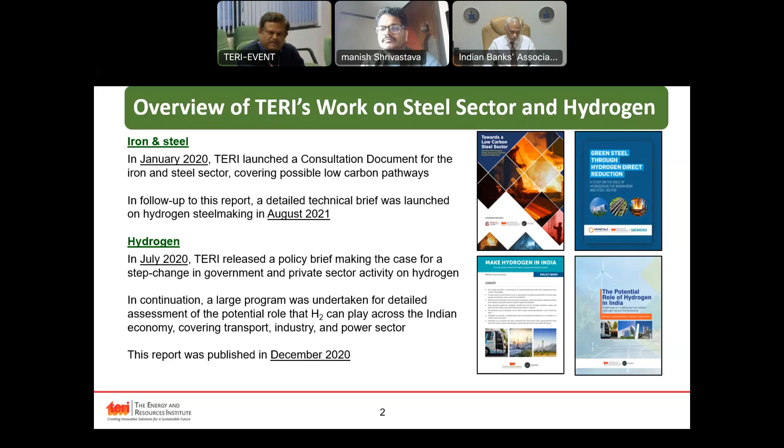I would like to begin my presentation with a brief introduction to TERI's work in the steel sector and also on hydrogen. Girish has already briefly mentioned it in his talk just before me. TERI has been working in the energy and environment sectors for the last 3.5 decades in the steel sector. The initial activities were in the form of conducting energy audits, mainly in the clusters of the secondary steel industry, doing the energy analysis, drawing the energy saving options, cost benefit analysis, and action plans for these industries.

So that is how TERI's journey began in the steel sector, and it built on this experience and worked in almost all secondary steel clusters across the country. Following up on this, TERI also developed designs of energy efficient technologies specifically for the secondary steel industry, facilitated pilot projects and demonstration projects, and worked further on policy briefs for implementing these technologies. So that is how TERI built its experience in the steel sector over the 3.5 decades. And as Girish mentioned, in the last 5 years TERI's focus has been mainly on the decarbonization of the hard-to-abate sectors, where steel is one of the prominent sectors.

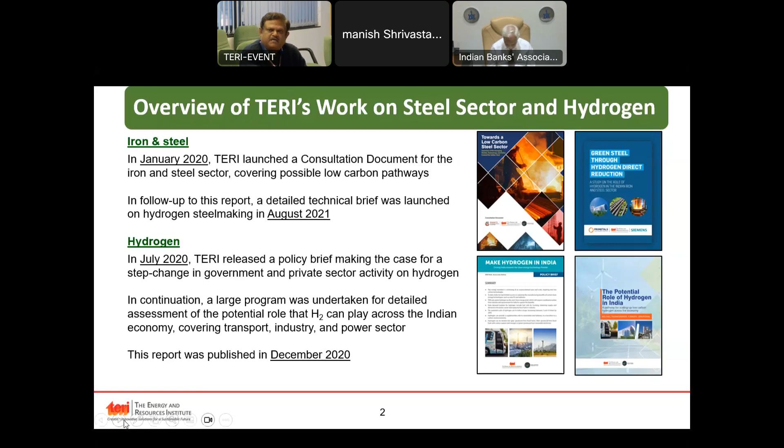Taking this work forward, TERI has come out with another publication, which is primarily based on a lot of consultations with stakeholders: Achieving Green Steel, a Roadmap to a Net Zero Steel Sector in India. In my next slides, I will be presenting key aspects, mostly the technology aspects, coming out of this net zero steel roadmap. While preparing this, TERI consulted various stakeholders, including industry, both large and secondary steel, technology providers, the financial sector, knowledge partners, and other key players. All these publications you can find on the TERI website. So that is briefly about TERI.

In addition to the projects I mentioned, TERI is continuing to work in this segment. We have been working on hard-to-abate sector decarbonization pathways, on steel, cement, and many other hard-to-abate sectors. We are also part of the task forces which the Ministry of Steel constituted. There are 14 task forces, one more has been added, out of which TERI has been the knowledge partner for seven of the task forces set up for a net zero steel industry for India. And there are other projects where TERI has been actively doing deep dive studies in the steel sector. That is about TERI's work and involvement in the steel sector.

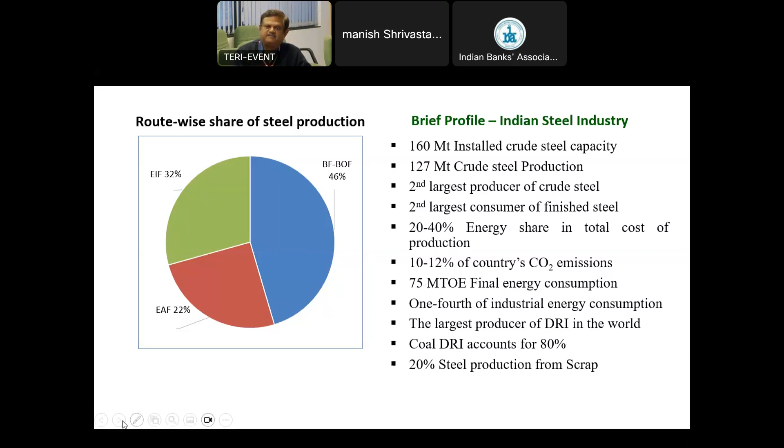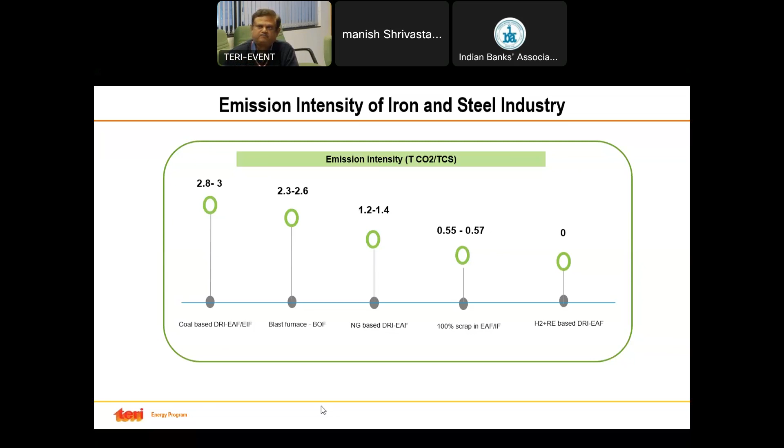Then I mentioned in my last slide about the DRI sector. So this primarily comes in the secondary steel category. Nearly 30 to 40% of iron is produced from this route. The balance is produced from the blast furnace route. So this is mainly the secondary steel segment.

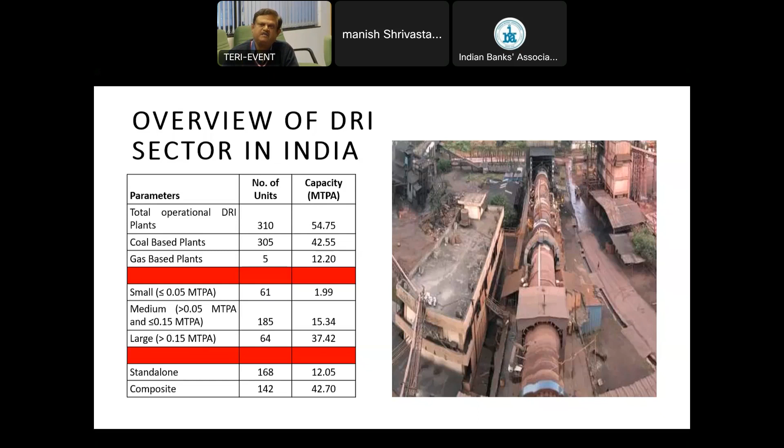Next slide, please. So that is about the DRI segment of the steel industry sector. This will mainly give you an idea of how steel making is in India, what are the main technology routes, and how is the emission intensity. Emission intensity is very closely related to the energy intensity and the fuels that are used. So that is why I have not focused on energy aspects of the steel routes.

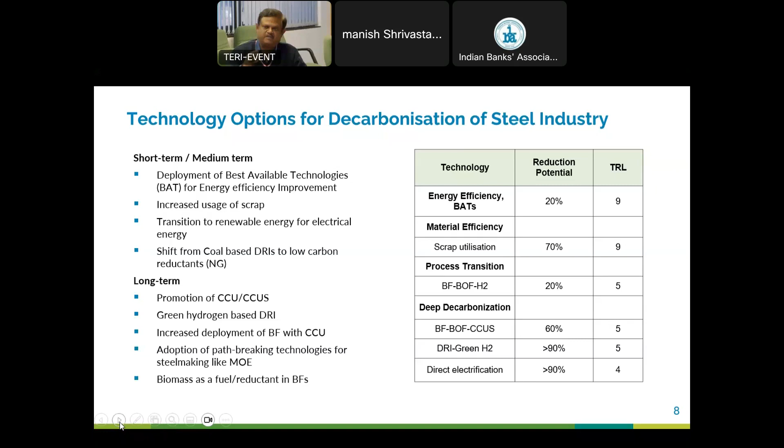However, we would need to stimulate demand for low carbon steel. The stimulation of demand requires a number of policy measures from the government, and the government should also focus on these things. Next slide, please.

Then maximize energy efficiency. This is one of the first measures I mentioned. The potential is high, 20 to 25%. It is a low hanging opportunity because the investments are low, the payback periods are attractive, and there are readily available proven commercial technologies. Next slide, please.

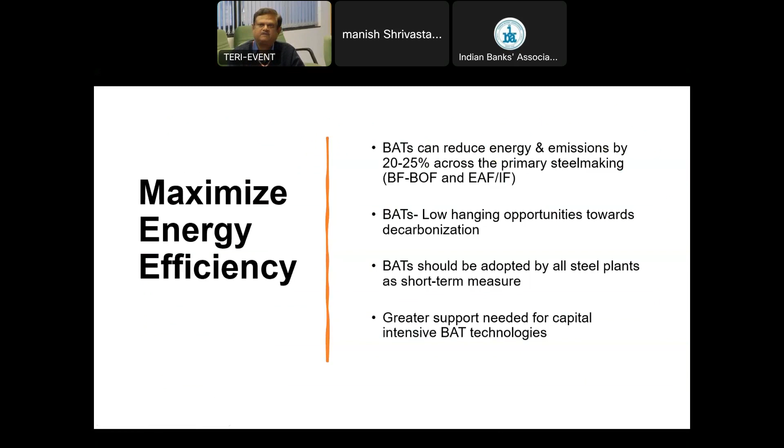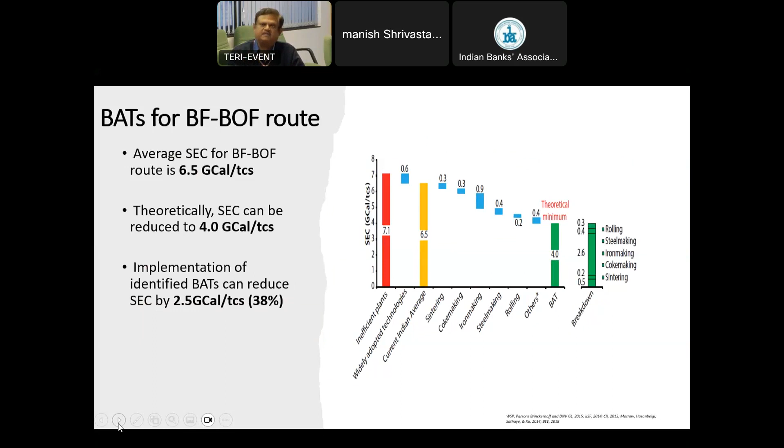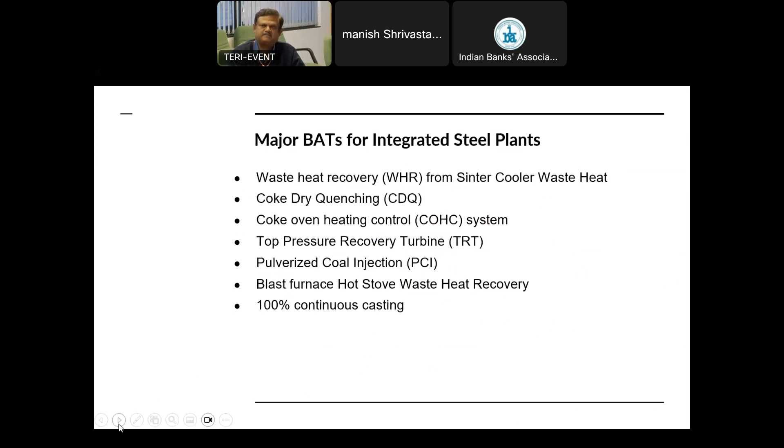And these are the various technologies. As I said, the best available technologies are already there, implemented to some extent, but the penetration level still needs to be improved. For various reasons, they are still not achieving the best, but there is scope. These are some of the energy efficient technologies, but there are more which can be added. This is for integrated steel plants. The next slide shows the energy efficient technologies for the secondary steel industry.

As you can see, most of these technologies focus on waste heat recovery, because the gases that come out from various processes and equipment of steel and iron production are at high temperatures. So the best way is to capture and utilize them either for thermal energy or electrical energy requirements.

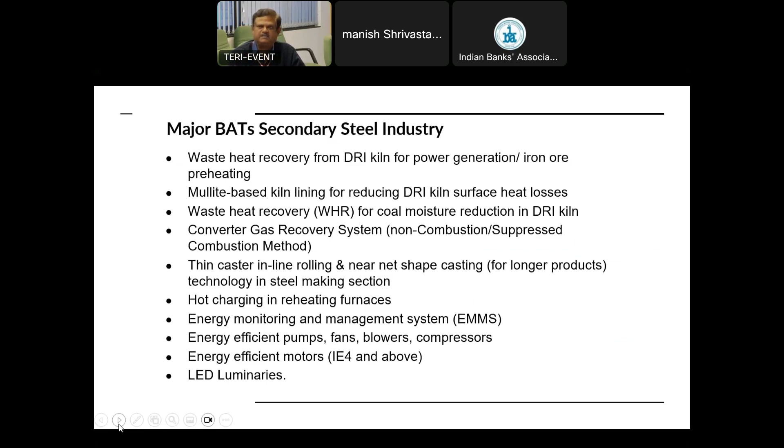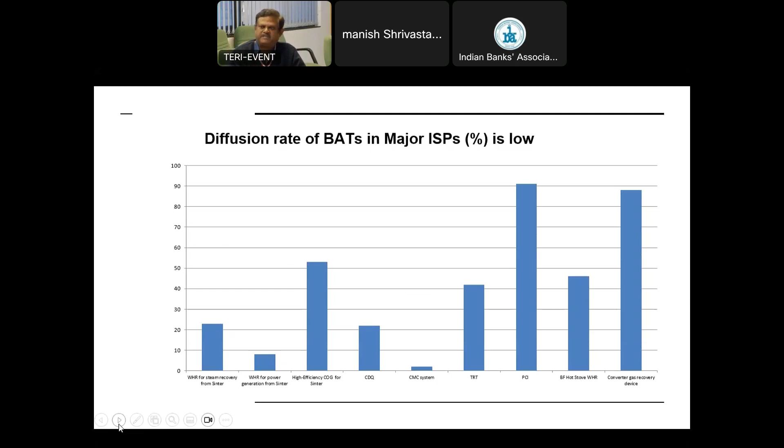Next slide, please. As I mentioned before, these are already proven, commercially available, but as you can see, the penetration level or adoption level or diffusion level is still very low. Even in the technologies where the adoption diffusion level is showing high, the implementation level still can be improved, in PCI as well as converter gas recovery. Next slide, please. That is all the story about energy efficiency.

The second I mentioned as an option is scrap utilization. The graphs show how 100% scrap utilization for steel making can have an impact on raw materials reduction by 85% and energy reduction by 70%. And then emission intensity, you see that around 85%. So this is the advantage of using 100% scrap, but scrap utilization has its own limitations. The first of the limitations is its availability and price in India.

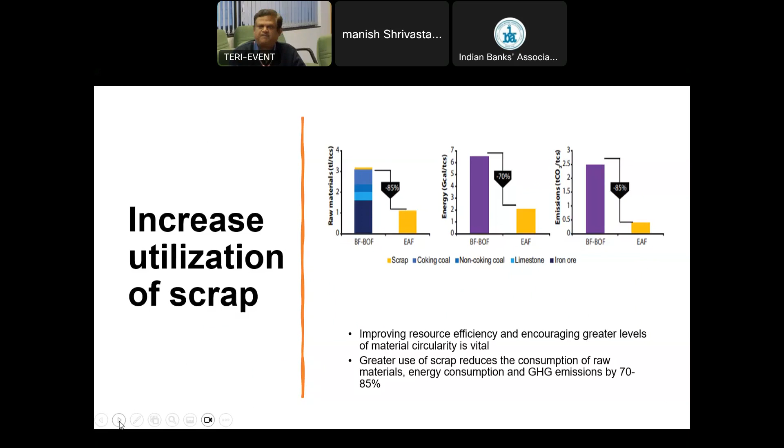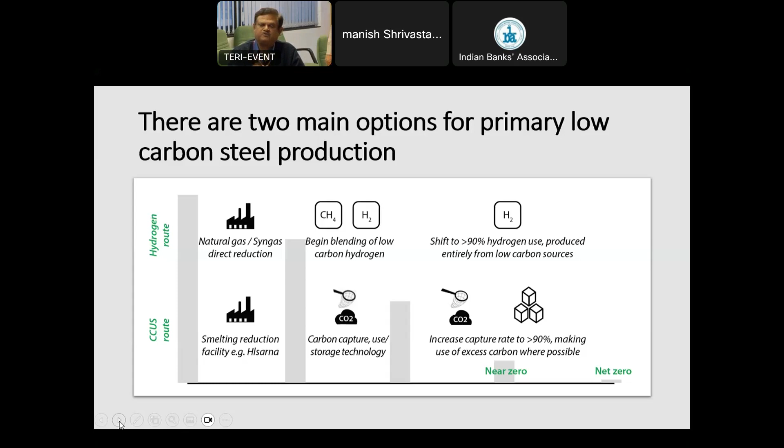Next slide, please. This I have already mentioned. The hydrogen route. There are primarily two major options. One is the hydrogen-based route where the fossil fuels can gradually over a period of time be shifted to hydrogen, so achieve net zero in that route. The second option is primarily for the blast furnace basic oxygen BF-BOF route, where it is hard to eliminate the fossil fuels utilization. Hydrogen can be blended to some extent, but a small extent, but still there will be a lot of CO2 emissions. For that, the option is go for CCUS route so that near net zero can be achieved.

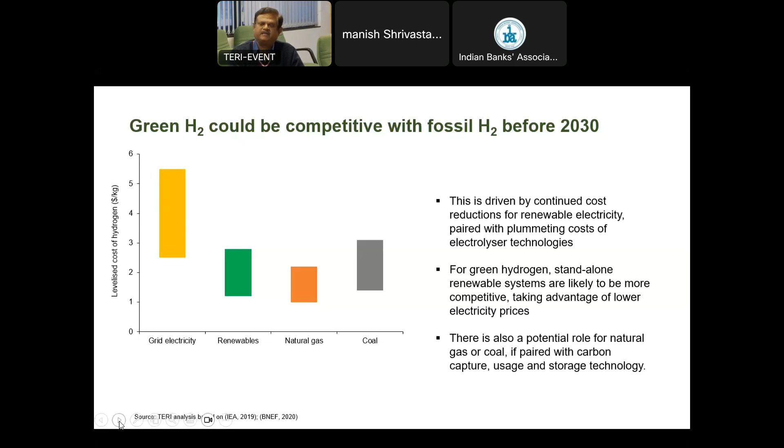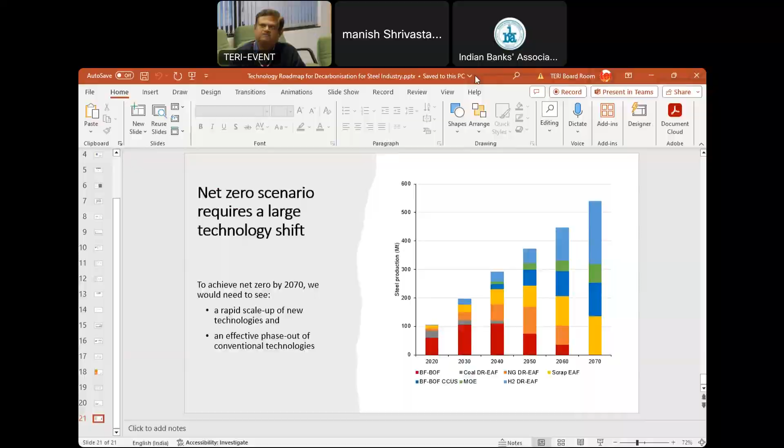Next slide, please. Thank you so much. That is what I would like to present for the steel sector.

Manish, over to you. Thank you, Sobhan ji, for this very informative presentation. Before I go to Taruna for the presentation on the cement sector, in case any of the participants have any burning question to Sobhan Babu on the macro picture, you can quickly ask or type in the chat box. I see there is one question which is more specific about pelletization: whether a pelletization plant is useful in achieving zero emission steel. So Sobhan ji, if you could quickly respond to this, and then we move to the next presentation.

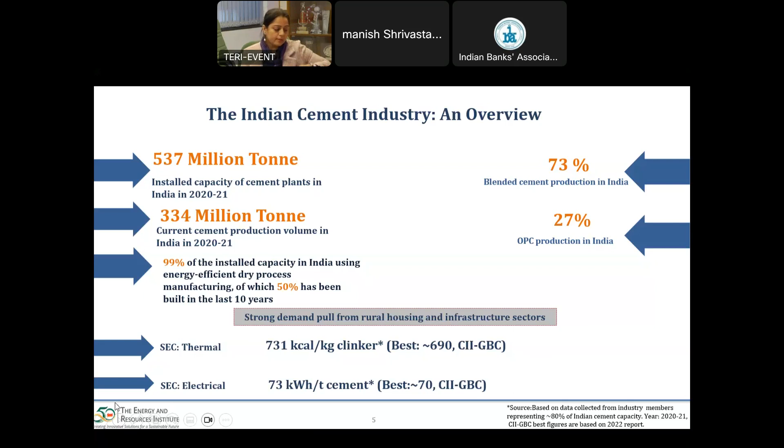And our Honorable Prime Minister announced the Panchamrit targets at Glasgow at COP26, while we are at COP28. It was announced that India is going to reduce its emission intensity by 45%. India will use non-fossil fuel capacity up to 500 gigawatts by 2030. India will meet 50% of its energy by renewable energy by 2030, and India will also reduce the projected carbon emission by 1 billion tons from now till 2030. By 2070, India will reach net zero.

So how do we align this with the cement sector? The key strategies, as I have mapped how the cement sector is going to contribute to achieving these Panchamrit targets, are energy efficiency improvements and clinker factor reduction, use of alternative fuels and decarbonization of electricity, and also exploring the opportunities of nature-based solutions. And lastly, by announcing net zero CO2 at concrete level by 2050. A number of cement companies have already come forward and announced their net zero plans by 2050.

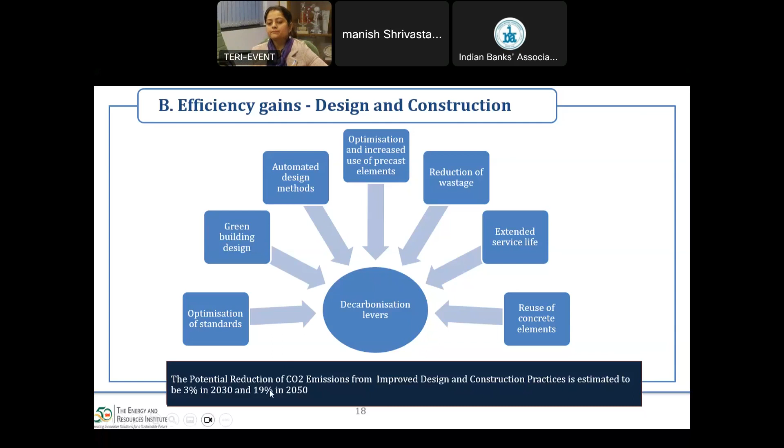Then I move to the key levers for decarbonizing the cement sector. The major element for decarbonizing the cement sector is clinker production. Clinker is the main product which is formed, and it is responsible for the major CO2 emissions because clinker, when it is formed, consumes a lot of energy, and once we reduce the amount of clinker which is produced, then we could achieve a lot of emission reductions.

So one is energy efficiency improvements in the production process, like using process optimization, clinker coolers, multi-channel burners, and integrating digitization methods. And secondly, the use of low carbon fuels or green fuels. Here, we would like to include low carbon fuels like alternative fuels, usage of municipal solid waste, use of green hydrogen, and use of biomass, and then also shifting towards kiln electrification.

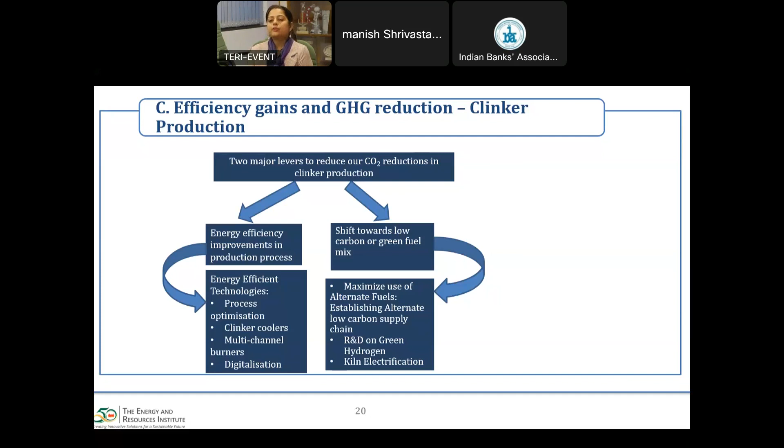So these are our projections for how the fuel mix trend would follow for the cement sector in 2020, 2030, and 2050. According to our projections, at present, the usage of coal and petcoke in the cement sector is approximately 95%, which is going to reduce to 40% by 2050. And the share of alternative fuels, for example biomass, and there is a massive opportunity to use fuels from fossil fuel origin like tire waste, is going to increase to about 50% in 2050.

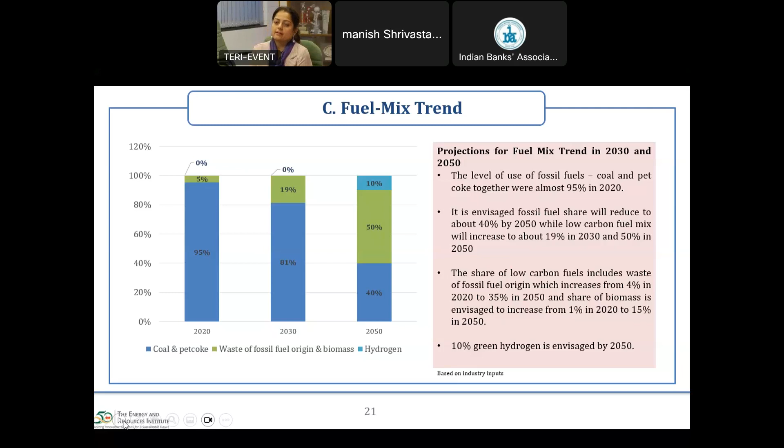And we also envisage that the share of green hydrogen is going to go up with the launch of the green hydrogen mission. It is now projected that we would have a green hydrogen infrastructure within our country, and the cement industry could use up to 10% of green hydrogen by 2050. So as you can see in the graph, the share of fossil fuels would reduce significantly by 2050, while the share of non-fossil fuels, including biomass and municipal solid waste or other alternative fuels like green hydrogen, are going to go up, which would have a major impact in reducing emissions from the industry.

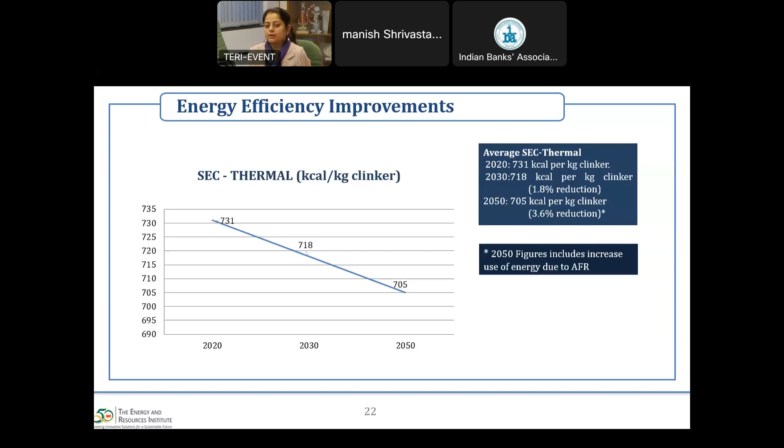So in this, it is projected that specific energy consumption, which is the thermal energy consumption for the production of clinker, is going to reduce from 731 kilocalories per kg of clinker to 705 kilocalories per kg of clinker. That means the consumption of thermal energy is going to reduce, and we project that the Indian cement sector can embrace these technologies, become more energy efficient and achieve higher emission intensity targets by 2050.

Similarly, the clinker factor, which is the amount of clinker as a percentage, would also reduce from 0.73 to 0.61 up to 2050, and it has a potential to reduce up to 15% of emissions by 2050. Next slide.

Then we talk about the supplementary cementitious materials, which are basically used to prepare blended cements. The share of blended cements in India has increased significantly. Up to 70% of blended cements are now used. And for the production of blended cement, we need supplementary cementitious materials, also called SCMs. We need fly ash, which is basically a byproduct of the power sector, and GGBS, which is ground granulated blast furnace slag, a byproduct of the steel sector.

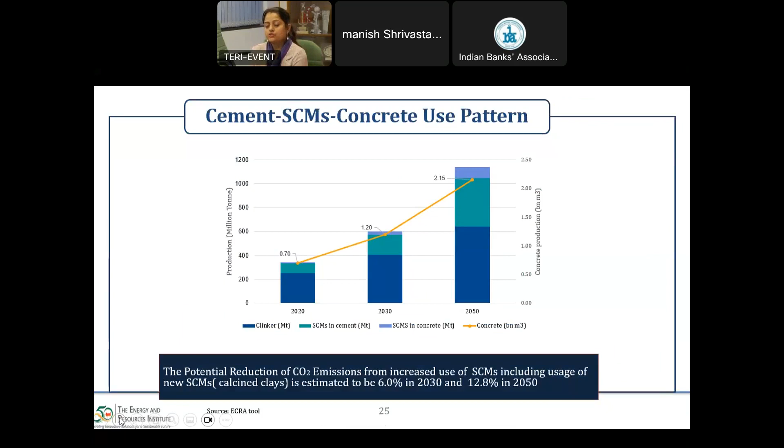So we wanted to see, if India would shift towards blended cements by 2050, whether these supplementary cementitious materials would be available by 2050 or not. And we have projected that yes, fly ash, slag, and calcined clay, all these supplementary cementitious materials would be available, and there is a potential to increase the share of blended cements in India. This graph basically shows the share of blended cements and SCMs in cement and concrete. Next slide.

And we have the new SCMs, which is LC3 cement. It has now been introduced worldwide, and BIS has also come up with the standard for LC3. And we have projected that LC3 cement could have 10% of market share by 2050. Next slide.

Then for decarbonization of electricity in the cement sector, cement industries have already implemented waste heat recovery plants for power generation, and are also embracing solar and wind as captive power plants, third-party generation or open access. So we project that the specific energy consumption on the electrical side would also go down by 2050.

Then recarbonation is one of the levers which we have considered. Recarbonation is basically natural uptake of CO2 by concrete, and we have projected that recarbonation as an accounting method is also a potential lever for decarbonizing the cement sector, and it could be one of the levers for India.

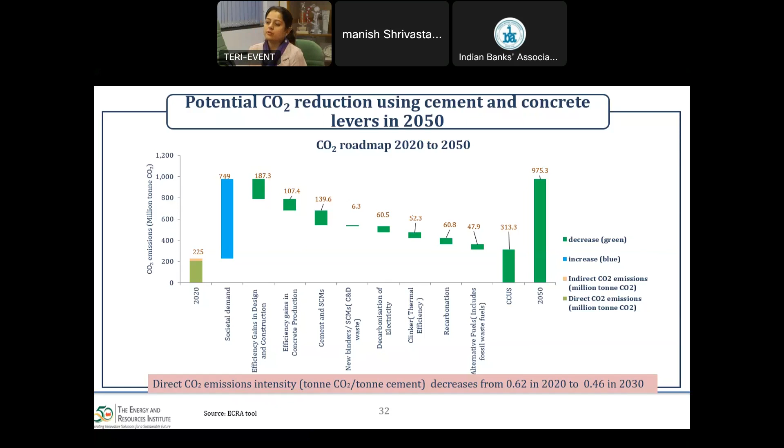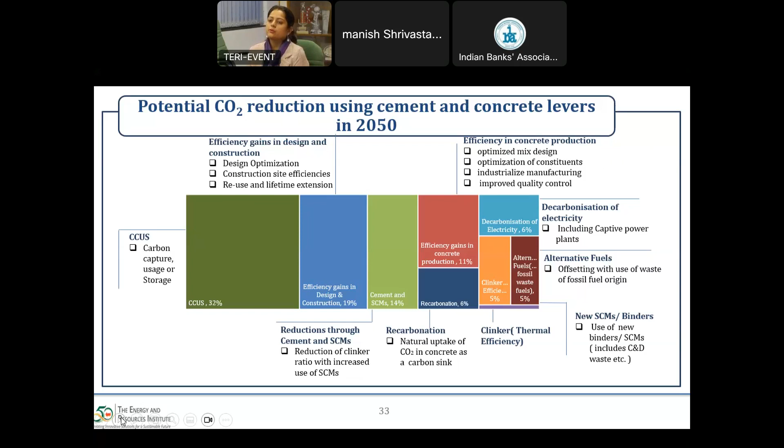So this is another representation of all the decarbonizing levers. But as you can see in the graph, the major lever would be the CCUS technologies, which would contribute approximately 32% of emission reduction. And then following that is the reduction through concrete production and design and construction, which would all contribute another 30%, and rest of the levers would contribute to various percentages of reduction by 2050. Next slide.

So we have identified the policy asks, the technology, the immediate technologies that we need is basically the demonstration plants for CCUS and standards, use of standards, and also financing. Like we require a lot of financing, which is transition financing for the cement sector, premium for the net zero cement and concrete to create the demand pull. And how do we de-risk the investments for building the sustainable infrastructure in the country? Next slide.

So basically we would see how do we implement the roadmap. So basically creating a demand for green cement, standards and definitions. It would be a mixture of market stimulation and demand creation, and also financing, technology, and policy. So it would be a mix of technology, policy, financing, and also creating a demand for the green cement.